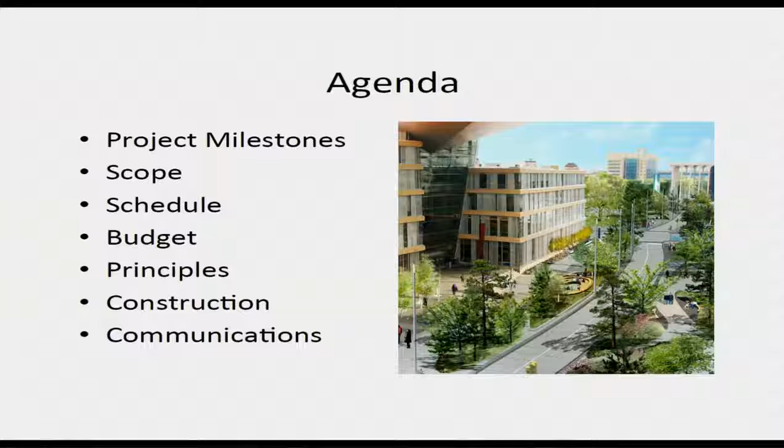I think it's good to review how we got to where we are today. In 2012 and 2013, we established an implementation committee and got the design going. In June 2014, the concept design was approved and we got the state grant. In May 2015, the special assessments were approved, giving me a fully funded project, and we told the utilities to go. In December 2015, I had a single bid and could not move forward. By May 2016, we got a redesign done, got the bids out, and awarded a contract to proceed. In June 2016, we started the roadway project for Nicollet Mall.

Generally, the scope is a total redesign and reconstruction, building face to building face, from Grant to Washington. We're taking out the slippery granite pavers and sidewalks, the roadway, the lights, signals, bus shelters. Everything's coming out. Along with that, most of the utilities are being upgraded along with the project, the underground utilities.

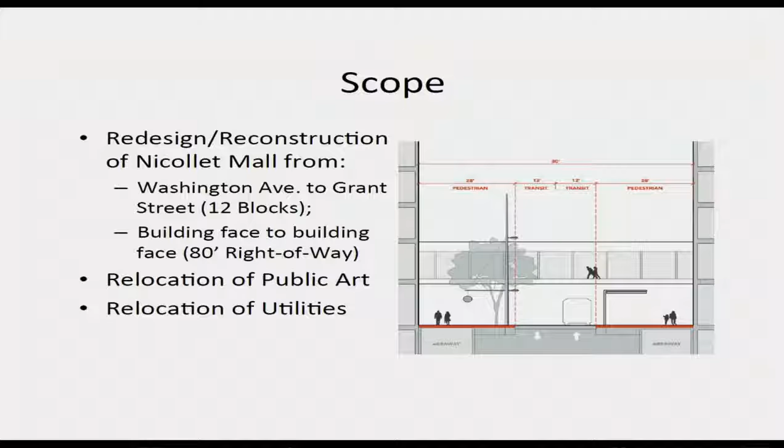What we're putting back is a new pedestrian clear walk zone, more green and trees with plantings, and a new elegant lighting system will go in. The old lighting was low, shined in your eyes, created a lot of glare. The new lighting is very high, and more uniform lighting is going in.

And raised intersections, making pedestrians a priority, where the roadway comes up to the sidewalk level, so it's straight across for the pedestrians. 11th Street is a good example. That intersection is nearly complete except for the signals going in. If people want to see what that's going to look like, that's in place right now.

Budget, it's a $50 million project. There's $25 million in state grant and city funds, and $25 million in private investment through special assessments. The project is currently on budget, and it's tracking to stay on budget as of right now.

Some guiding principles for the project: it's a place for people, it's pedestrian friendly, it's green, it's year-round use, and we're trying to activate all 12 blocks. It's elegant and durable, it has an urban design, and it has cost-effective operation and maintenance for what we're putting in out there.

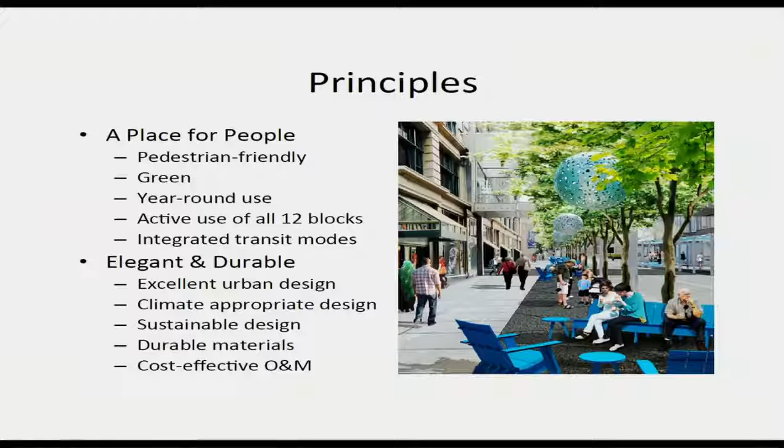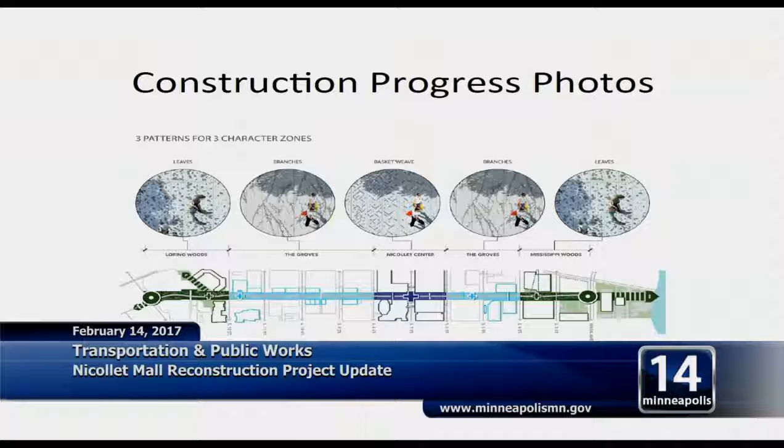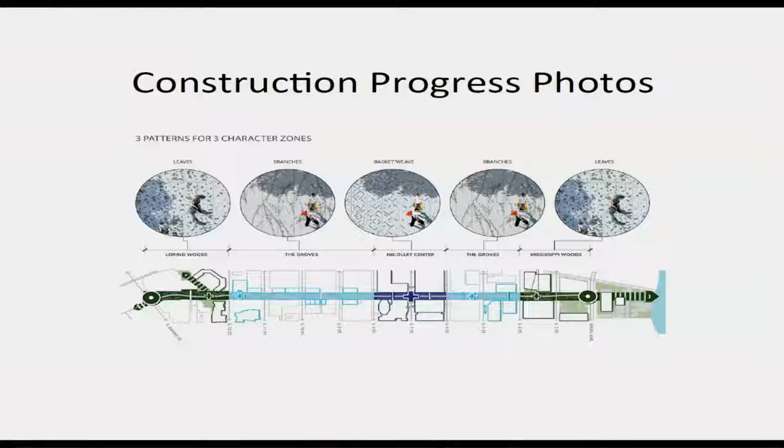Present progress and conditions. There's three main parts to this Nicollet Mall project. I have an underground component, an at-ground component, and an above-ground component. I really have a three-dimensional project going on Nicollet Mall. A large portion of what we do will not be seen by the public, and when we're done, they won't even know it happened. It's all going on underground or right below the sidewalk. It's a very significant amount of work to get that done.

For the most part, the surface work out there is complete from Grant to 11th, as well as the west side up to 10th. And then there's a portion at the IDS building that's completed. It's ready for trees and lights.

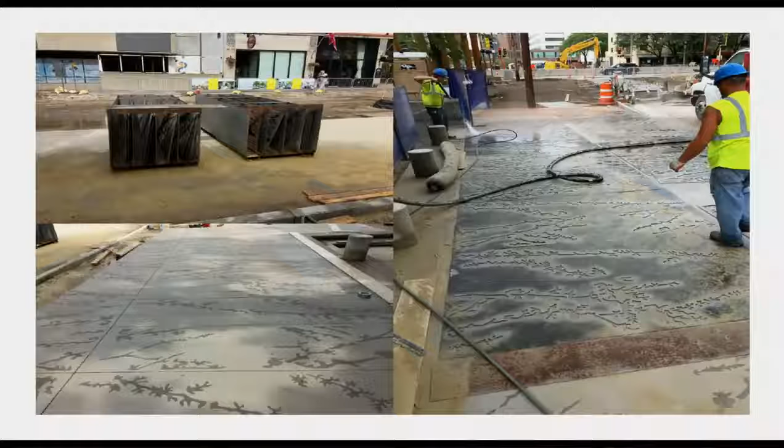I have some construction photos. This is our stenciling process that we've talked about. In the upper left-hand corner are metal stencils. There's about 32, three different designs, and then different intensities of elements in these stencils. On the right side of the screen, after the concrete is placed and sets up, these stencils are placed down on top of that concrete. Then there's a high pressure etching process that goes on, and the end result is that lower left. That's the look and texture you get to the concrete sidewalk that's out there.

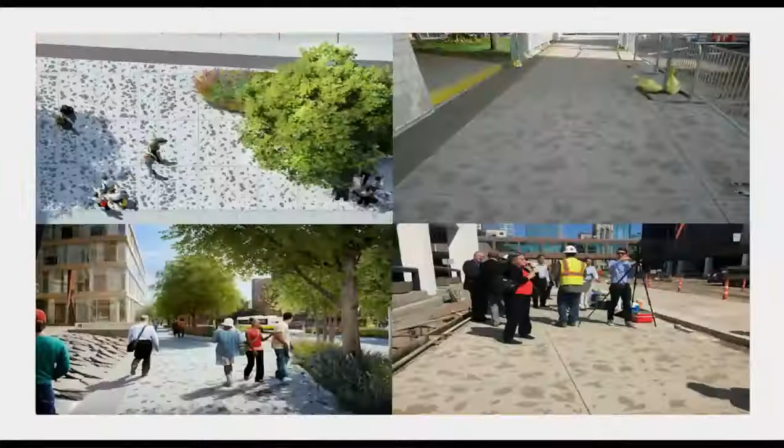So on this photo, on the left-hand side, is the computer graphics we were showing through the design, and on the right-hand side, that's what we have. They're very close to what we said we'd do. There's different intensities of the pattern, some are closer, some are farther apart. So what we showed is what we have.

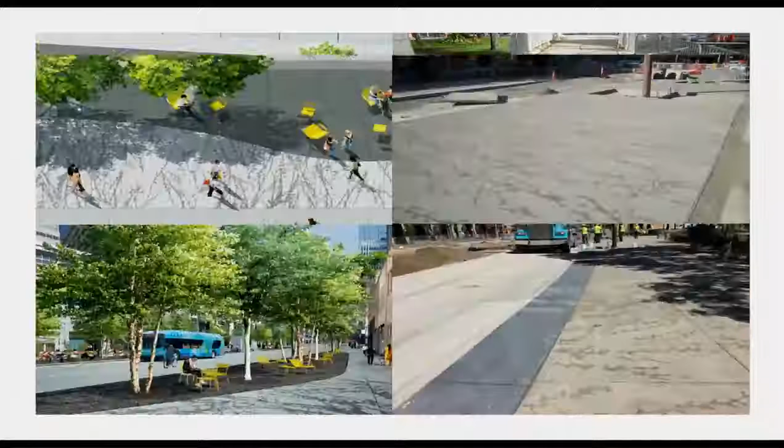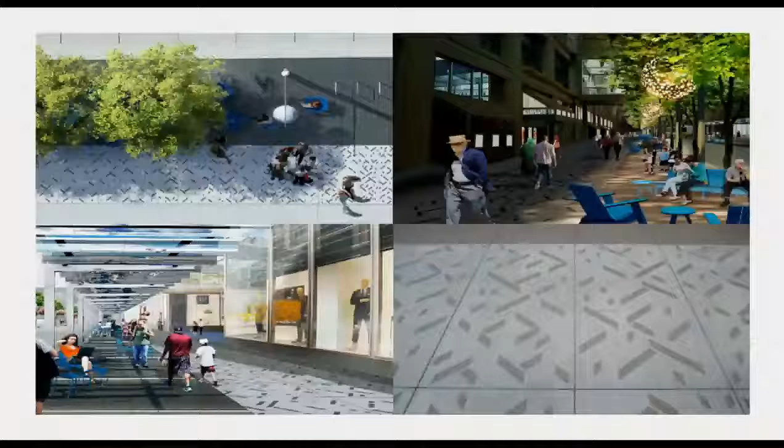In the Groves area, similarly, on the left is what we were showing, and on the right side is what we have today. These are in place. That photo there on the right, I think, is near Peavey. And then in the center portion near the IDS, we have that pattern, what we were showing and what we ended up with.

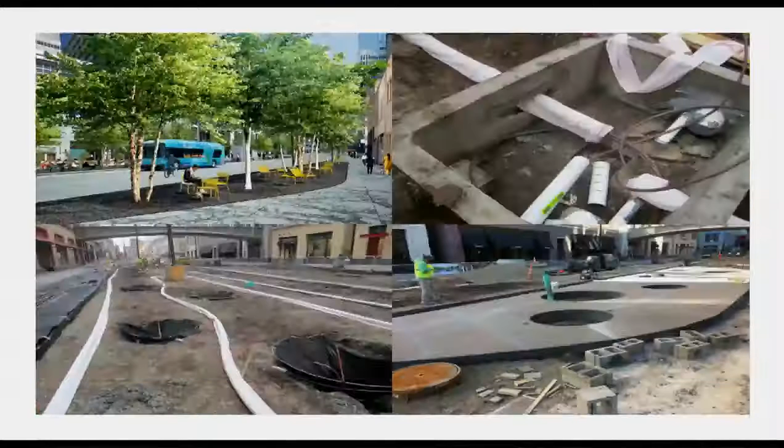Things that go in at ground or just under the sidewalk, we have extensive irrigation going in for the planting areas and the trees. In the lower left, we have tree baskets, which indicates where we're putting the trees. It's kind of a placeholder, reserves a spot for the trees. Then the irrigation system goes in. The upper right, it all connects into a main controller box that will run the irrigation system for the trees and the plantings. There's a lot of irrigation that's going in, and it's all covered up with the concrete. So I have to get all that in place, then that concrete goes down. It's all ready to go for the trees to come in.

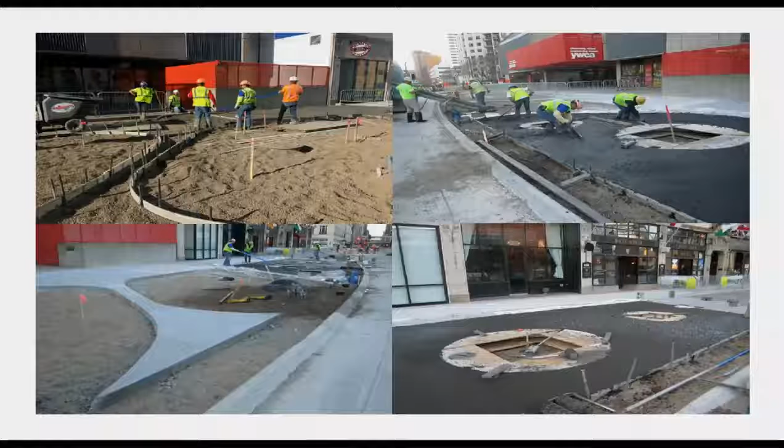We are doing some complex form work with the concrete. This is more than just putting in a standard sidewalk. In the upper left, the forms were put in for the concrete. In the lower left, that's what it looks like after that concrete pour goes in. But because we're doing multiple colors, I can't do it all at once. In the upper right-hand corner is the different color and texture concrete that then fits into the puzzle piece on the sidewalk grove area. And in the lower right-hand side, the wood forms that are in, that's what's holding the concrete back for the future tree locations. It all comes together in multiple stages.

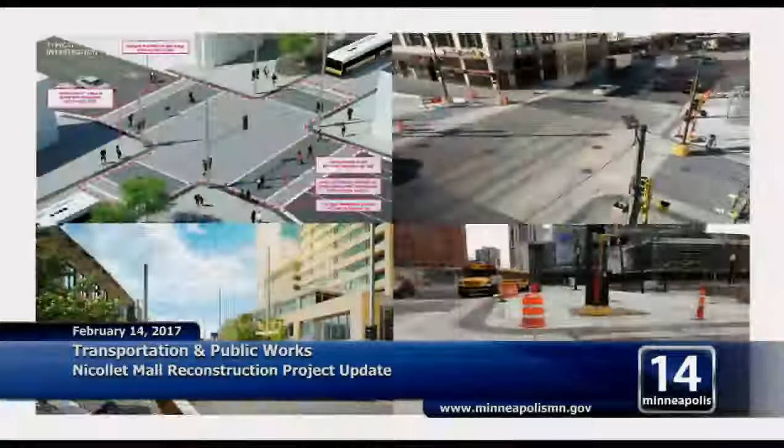Raised intersections, another feature for the mall. On the left-hand side is what we were showing earlier during the concept phase. Right-hand side is what we have today at 11th near Peavey. The crosswalks are a different color to indicate where pedestrians should go.

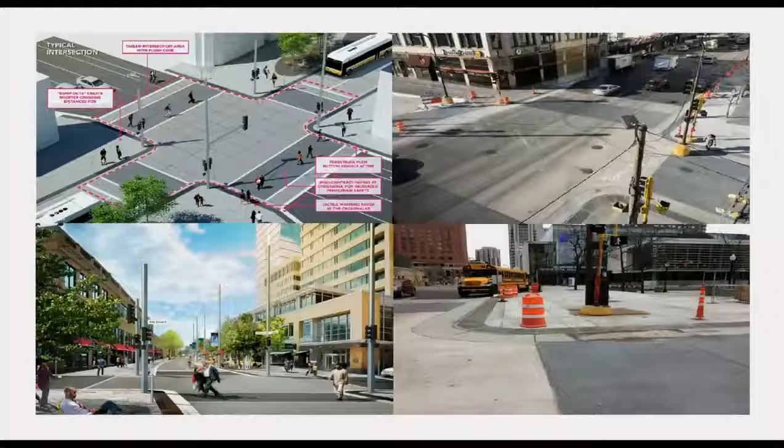To put this in, it goes in multiple phases. You have to pour the different colors at different times while keeping traffic open for vehicles and pedestrians. So construction of the intersection is very complex, done half at a time, keeping everything open and getting trucks in there simultaneously. But when we're done, that lower right-hand corner gives a good perspective looking at Peavey, showing how the sidewalk matches right in at that intersection and what that's going to look and feel like for the pedestrian experience.

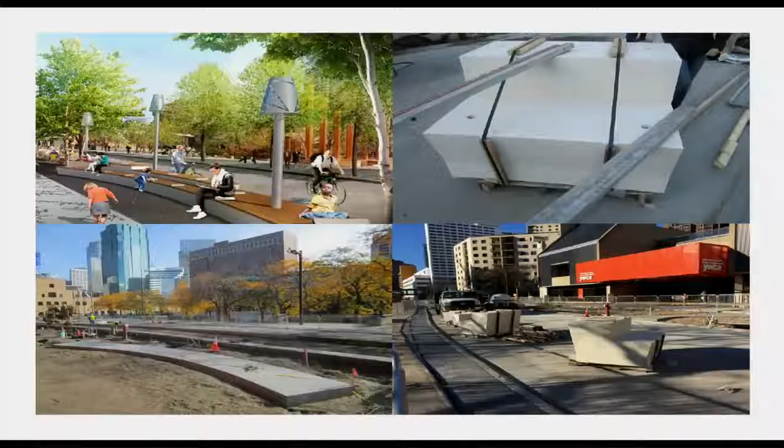Reading room - this is a future installation of items. The upper left-hand corner is the concept of the reading room. Lower left shows the foundation poured for that bench work, which is in place right now. In the upper right, we brought in the pieces for that bench - it goes together like a puzzle. On top of that are wood slats being manufactured right now, so that will go into the mall as soon as the wood's ready.

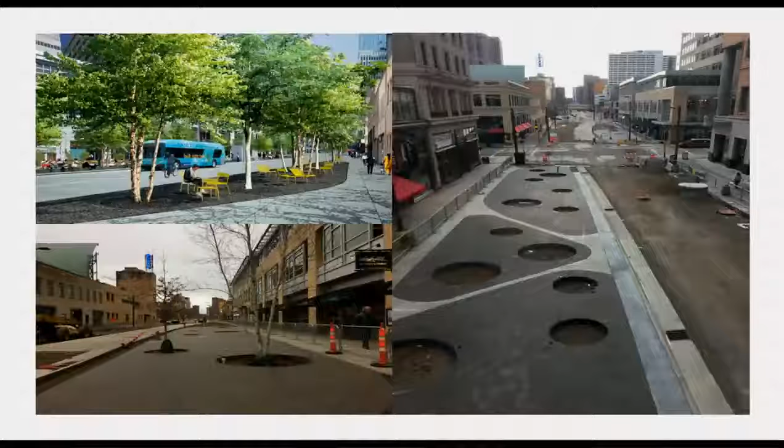The future roadway is to the right of the groves. There'll be that narrow band, and then more sidewalk on the far side towards the newsroom. But I like this perspective - it really gives us a sense for what we're going to be putting out there when we're done, and how much space we have to work with.

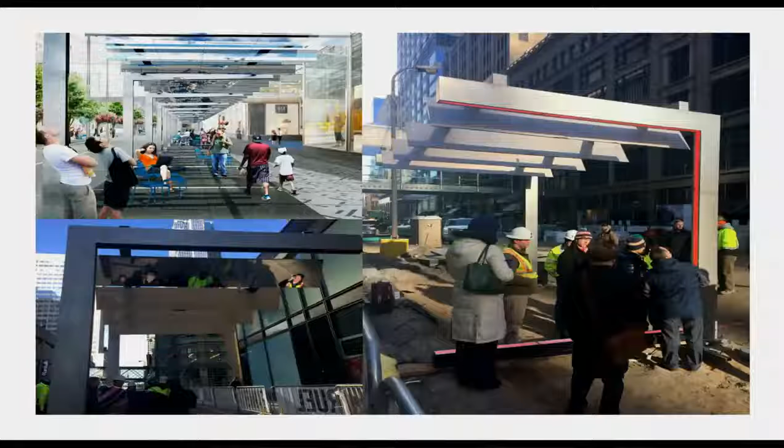Within the last couple of weeks, we put in a portion of the armature, which is part of the light walk. On the upper left-hand side is this 2-block light walk, as we're calling it - a series of mirrored louvers up above with illumination as well. On the right-hand side, we installed this about 2 weeks ago, a prototype or test piece, just to make sure we had it all figured out.

Lights turned on - in this case they're red, but they're programmable. They change colors and run through a cycle. In that photo, where the people are standing, that's going to be sidewalk, and the roadway is off to the far right. So we got this installed, and we're moving ahead to install the 2 blocks of this light walk, which is a signature feature for Nicollet Mall.

That's in place right now at 7th and Nicollet. If you go out there, you'll see it. There's some protective wood around the base, but you can see it up above and get a sense for what the mirrors are going to look like, and what this corridor is going to be.

Furniture - deliveries are in progress. We have some on site right now, not on the Nicollet Mall site, but in a secure storage area.

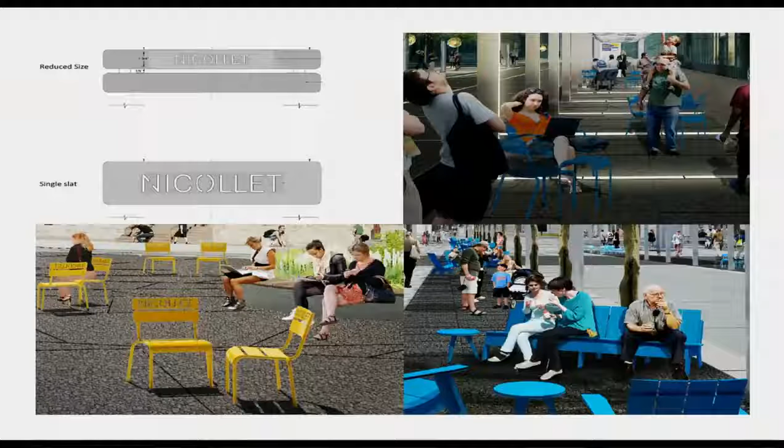Complexities of delivery - the at-ground complexities for this project are significant. We're providing a 10-foot clear path through the corridor, maintaining access across the corridor at all the side streets, and maintaining access to all the businesses at all times during the project. It's a challenge, but we have solutions - it is a challenge to keep a lot of people going through the corridor, and that's the good news: we're open for business and keeping people moving through the corridor.

We've been creative - built plywood sidewalks and a bridge to get people into restaurants or businesses, making it accessible, as well as pedestrian fencing. We have over 2 miles of pedestrian fencing on this project to keep pedestrians safe. That's a key piece. We have temporary signs, detours, temporary sidewalks as needed, and we're building bridges as needed. We also have temporary crosswalks, temporary signals, and temporary pedestrian level lighting. I have to make sure it stays lit, make sure I still have crosswalks, but I have to take all the old stuff out and take it offline - significant effort to make this passable and usable for pedestrians.

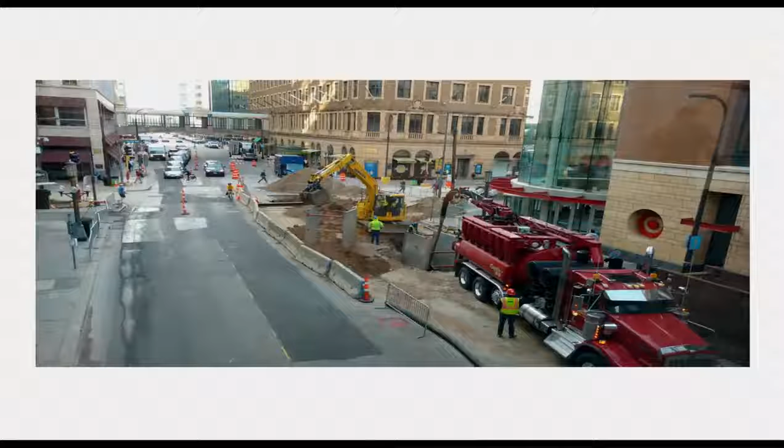The other piece that many folks don't see is the underground work, and the mall is full of utilities underneath. There's not a lot of room left, and this is in three dimensions. Coordination of the underground work has been significant, impacting along the mall and also all the crossing side streets. Upgrades were needed now, so we can provide service needed for the future. This is a key piece of the overall Nicollet Mall project.

I needed to keep existing facilities operational during the move, because we are unable to take everything offline, so we have to build new before we can take out the old. And there's not a lot of room in the corridor. On other projects we can open up the road and all the utilities come in, but this is a good photo to show the limited space we have to work in.

This is a utility trench. There are utilities on both sides of this and below this that they're working around to put this in. I have an operational sidewalk cafe on the sidewalk on the right and another one on the left, and I only have enough room for one truck to get down that street while we do work on this corridor. It's a very tight, very constrained corridor, and there's just not a lot of room, so this takes time and significant effort.

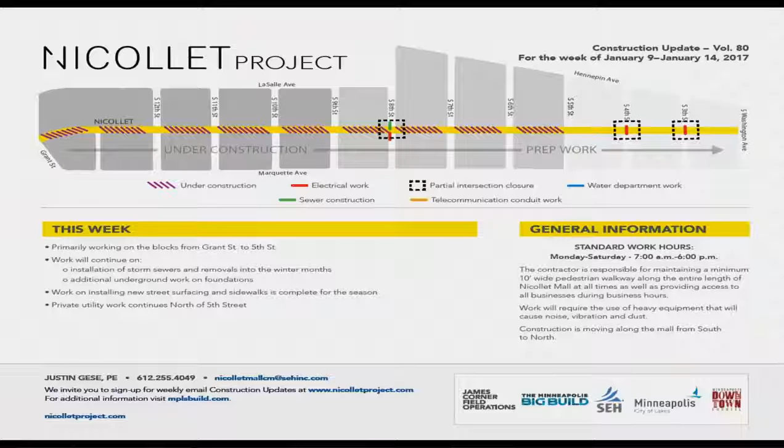Communications. A key piece to our project has been communications. We have web pages for the project, but we also hold weekly construction meetings. This is key for our project team and the businesses right on the corridor. Every week we get together, we talk about the general conditions on the project, what's happening this week, what we got done last week. It's important for the project team and the businesses to understand some of the challenges we run into, some of the challenges they run into, events that they have, and how to make it all work. At this meeting, we talk these issues and items through.

We talk about any updates and accomplishments as well, and this goes on every week during construction. We also send this out in an email blast format to tell anybody who's signed up where we're at this week and where we're going next week.

There's also been media attention on this project, as well as one-on-one individual meetings, where we meet with individual property owners to figure out how to build a bridge to get people into their business. Our schedule sometimes gets down to the exact hour—can you not do that work till after 2 in the afternoon? We try to accommodate businesses and what they need, and do as much as we can to communicate so these businesses can plan what they need to do for their work as well.

Looking ahead, in April we're going to pick up right where we left off, and work will progress a little differently than it did last year. The land use changes as I move north a little bit. I would anticipate that every block will have intense operational activity on it in 2017. Roughly in the June timeframe, that's when trees begin to come online from south to north—they'll come in phases or waves. And in July, the light poles start coming in that same fashion, south to north.